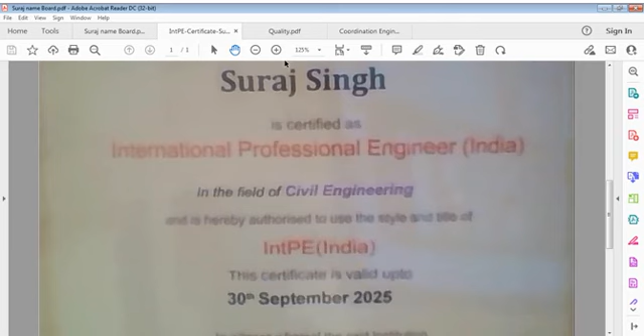This is my certificate of arbitration engineer, and this is International Professional Engineer certificate. This is Chartered Engineer certificate. This is quality file, and this is coordination file. I close Chartered Engineer certificate and I close arbitration engineer certificate. I'll open if it's required.

And now we go to the quality file. Quality, which is the essence of this talk. It's not new, it has been for long. For me, quality is life. You have life - if it is quality-less, you have no life, frankly speaking. People think money is life.

Some people think spiritualism is life. Some people think good living is life, or art of living is life. But nobody talks of requirement of quality, and that's unfortunate. People are not interested in quality of life. Quality of life means what we do, what is our contribution to make something good, and then better, and then best. Do we? My answer is no.

And particularly in our country, that is Bharat, India, we have to question ourselves for the quality issue and also for the coordination issue. Digital world has destroyed coordination. To be very frank, I can openly and with full confidence state quality cannot be achieved without application of required coordination, and coordination can be effected only if we know what information

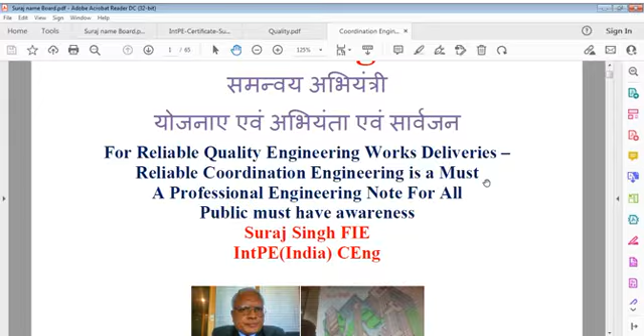We have to keep ourselves awakened, not sleeping, if we want to achieve something. In this regard, coordination is very important, and that is engineering coordination, for projects, for public, and we can say reliable quality engineering works deliveries is must. Same way, reliable coordination engineering is a must. Quality engineering is a must. Professional engineering, of course, constitutes both.

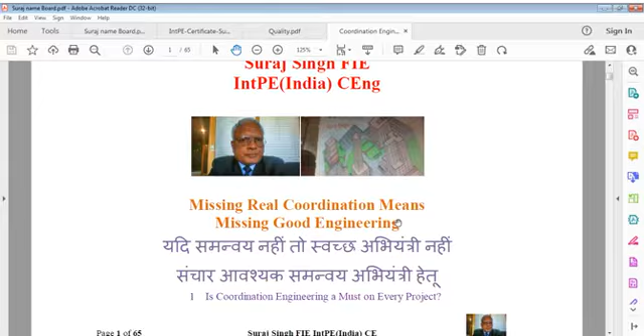And in addition to these subsidiaries, it requires primary materials, primary technology, and missing real coordination means missing good engineering. There are so many issues involved in this, and we have to be very serious about that.

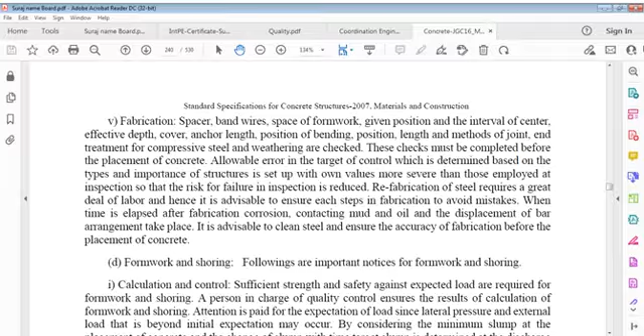Now I'm just moving on to file of concrete, because that is an important item, concrete, which we may say is our real requirement. We were yesterday somewhere, and it was mass concrete. I'll start from that, because mass concrete is a very important item, and its general is mass concrete. We did it yesterday, but because of disconnection of video, we could not continue it. So I'm just moving back to page 228 of mass concrete or massive block concrete.

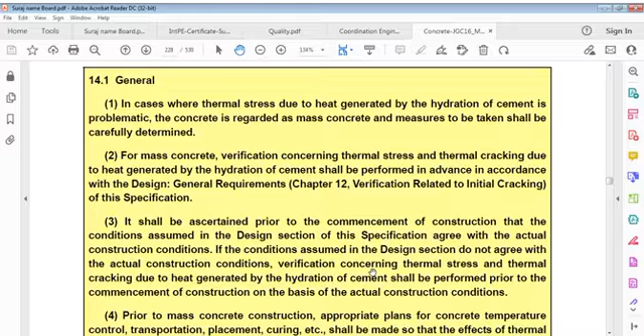In cases where thermal stress due to heat generated by hydration of cement is problematic, concrete is regarded as mass concrete, and measures to be taken shall be carefully determined. Mass concrete verification concerning thermal stress and thermal cracking due to heat generated by hydration of cement shall be performed in advance in accordance with design general requirements.

It shall be ascertained prior to commencement of construction that conditions assumed in design section of this specification agree with actual construction conditions. If conditions assumed in design section do not agree with actual construction conditions, verification concerning thermal stress and thermal cracking due to heat generated by hydration of cement shall be performed prior to commencement of construction on basis of actual construction conditions.

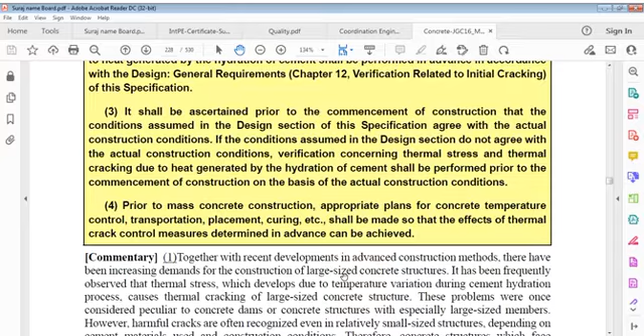I repeat, it shall be ascertained prior to commencement of construction that conditions assumed in design section of this specification agree with actual construction conditions. If conditions assumed in design section do not agree with actual construction conditions, verification concerning thermal stress and thermal cracking due to heat generated by hydration of cement should be performed prior to commencement of construction on basis of actual construction conditions.

Prior to mass concrete construction, appropriate plans for concrete temperature control, transportation control, placement control, curing control, etc. shall be made so that effects of thermal crack control measures determined in advance can be achieved. So these are many controls we should think of again and again: temperature control, that's very important when fresh concrete is delivered, and transportation from mixing plant to site and from site to actual location of concrete, which is done by either crane or by pumping.

And then when you received it on location, how to place it there, placing concrete on slabs or in columns or in beams or whatever else. And after doing finishing of that placement, after vibration, etc., curing, how to apply that - all these plans should be considered prior to doing mass concrete or massive block concrete. It's not easy. Every activity requires to be understood in this way, and this shall be made so that effects of thermal crack control measures determined in advance can be achieved, and that is the objective of mass concrete, because temperature difference, generation of temperature itself, thermal energy in case of mass concrete is quite huge, it's quite considerable.

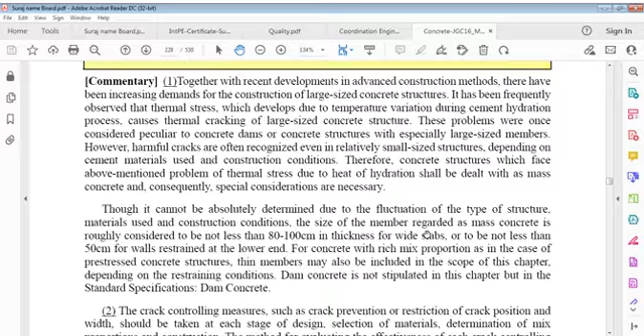Concrete structures which face the above mentioned problems of thermal stress due to heat of hydration shall be dealt with as mass concrete, and consequently special considerations are necessary. Though it cannot be absolutely determined due to fluctuation of type of structure.

Depending on materials used and construction conditions, size of member regarded as mass concrete is roughly considered to be not less than 80 to 100 centimeters, or 1 meter - you may say 800 to 1000 mm size. Generally it is 80 centimeters or 800 mm which we take in practical life. I have seen many projects about that, and a size of 80 centimeters or 800 mm is considered a thick member.

Ought to be not less than, for walls it is 500 mm. If a wall is 500 mm or more thick, it's considered a thick member or massive block. And if it is restrained at the lower end, for concrete with a rich mixed proportion, as in case of prestressed

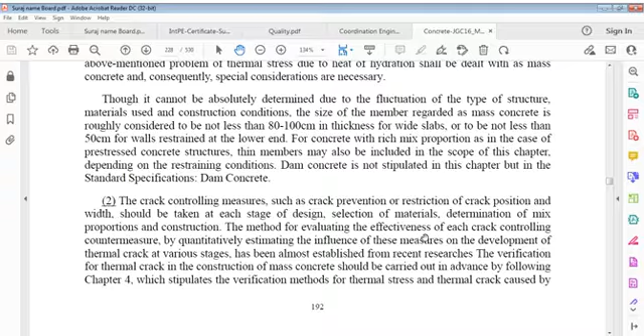Prestressed concrete structures, thin members may also be included in the scope of this chapter if it is prestressed concrete, depending on restraining conditions. Dam concrete is not stipulated in this chapter but in the standard specification for dam concrete.

Crack controlling measures such as crack prevention, or restriction of crack position and width, should be considered at each stage: design, selection of materials, determination of mix proportions and construction. Selection of materials - what materials we have to select, aggregate, etc. Determination of mix proportions, that is by trial mix, and its construction.

Method for evaluating effectiveness of each crack controlling countermeasure by quantitatively estimating the influence of these measures on development of thermal crack at various stages has been almost established from recent researches. Verification for thermal crack in construction of mass concrete should be carried out in advance by the following.

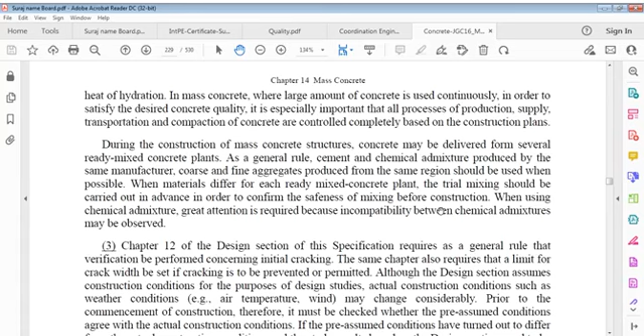Block concrete, where a large amount of concrete is placed continuously in order to satisfy desired concrete quality - it is especially important that all processes of production, supply, transportation and compaction of concrete are controlled completely based on construction plans. So we have again to go back to the process of production, supply, transportation and compaction of concrete, which all require complete professional controls.

That's why I always stress on method statements, construction procedures, which are very significant before doing whatever job we do. And if we don't do that, this means we do it in a blind world.

During construction of mass concrete structures, concrete may be delivered from several ready-mix concrete plants. As a general rule, cement and chemical admixture produced by the same manufacturer, and coarse and fine aggregates produced from the same region, should be used when possible.

When materials differ for each ready-mix concrete plant, trial mix should be considered. It should be carried out in advance in order to confirm safety, or you can say without impact, before construction. When using chemical admixture, great attention is required because incompatibility between chemical admixtures may be observed.

As a general rule, verification should be performed concerning initial cracking. The same chapter also requires that a limit for crack width be set, if cracking is to be prevented or permitted.

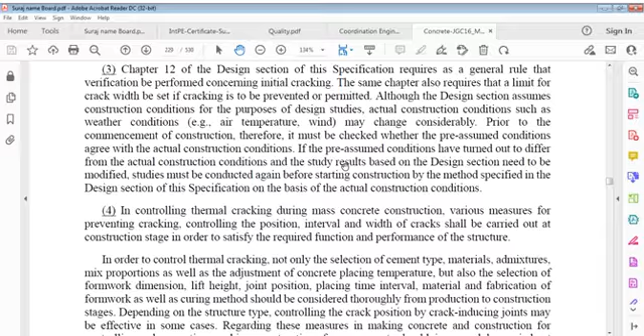Although the design section assumes construction conditions for purposes of design studies, actual construction conditions such as weather conditions, air temperature, wind speed may change considerably prior to commencement of construction. It must be checked whether or not presumed conditions agree with actual construction conditions.

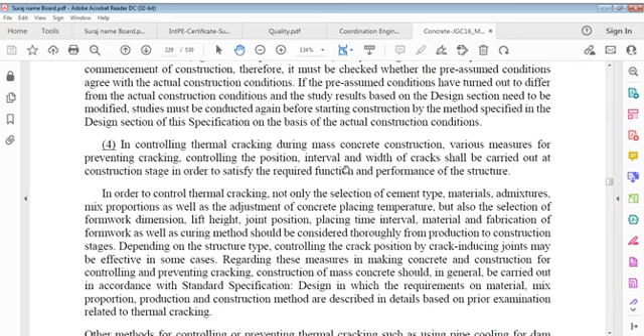If pre-assumed conditions have turned out to differ from actual construction conditions, and study results based on the design section require modification, studies must be conducted again before starting construction by the method specified in the design section.

In controlling thermal cracking during massive block concrete pouring construction, various measures for preventing cracking and controlling position, interval and width of cracks should be carried out at the construction stage in order to satisfy required function and performance of the structure.

In order to control thermal cracking, not only selection of cement type, materials, admixtures and mix proportions, as well as adjustment of concrete placing temperature, but also selection of formwork dimension, lift height, joint position, placing time, interval, material and fabrication of formwork, as well as curing method, should be considered thoroughly from production to construction stages.

In order to control thermal cracking, what do we have to do? Not only selection of cement type, materials, admixtures, mix proportions, and adjustment of concrete placing temperature, but also selection of formwork dimensions, height of concrete lift, location of construction joints, placing time interval, material and fabrication of formwork, as well as curing method. Consideration must be given thoroughly from production to construction stages.

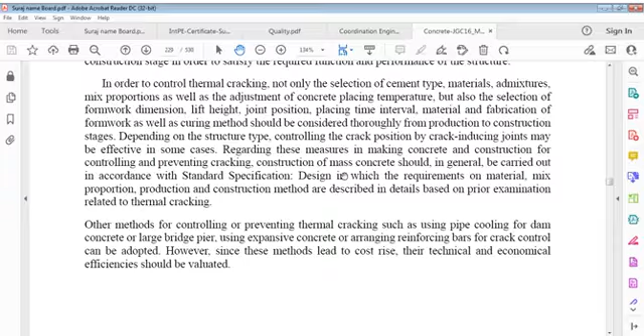Regarding these measures in making concrete and construction for controlling and preventing cracking, construction of mass concrete should in general be carried out in accordance with standard specification. Designs in which requirements on material, mix proportion, production and construction methods are described in detail are based on prior examination related to thermal cracking.

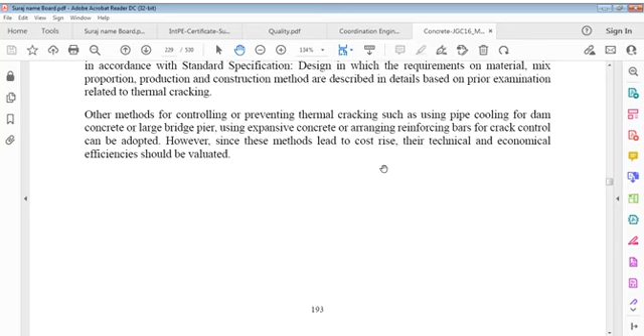Other methods of controlling or preventing thermal cracking, such as using pipe cooling for dam concrete or large bridge piers, using expansive concrete, or arranging reinforcing bars for crack control, can be adopted. However,

what about materials? Cement and admixtures used in mass block concrete should be those specified in design, and if other cement or admixtures are to be used, verification concerning thermal stress and thermal cracking due to heat generated by hydration of cement shall be performed.

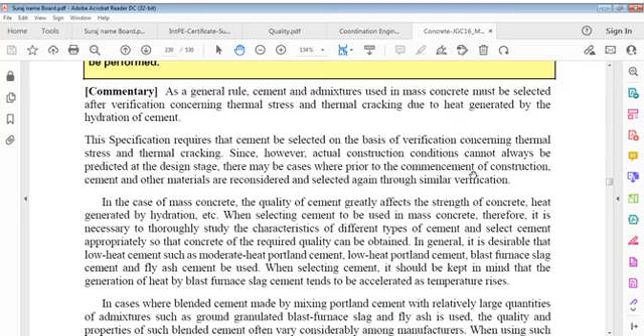Cement and admixtures used in mass concrete must be selected after verification concerning thermal stress and thermal cracking due to heat generated by hydration of cement. Specification requires the cement be selected on the basis of verification concerning thermal stress and thermal cracking.

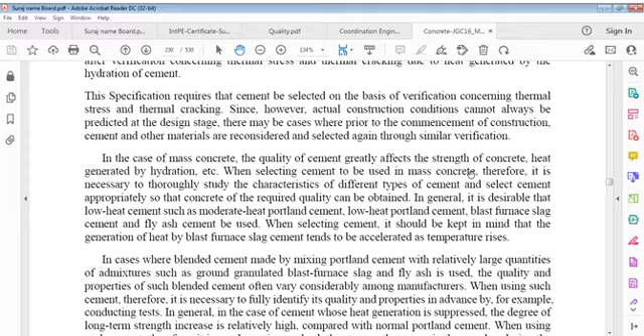Since, however, actual construction conditions can't always be predicted at the design stage, there could be cases where prior to commencement of construction, cement and other materials are reconsidered and selected again through similar verification.

In case of mass concrete, quality of cement greatly affects strength of concrete and heat generated by hydration when selecting cement to be used in mass concrete. Therefore, it is necessary to thoroughly study characteristics of different types of cement and select cement appropriately so that concrete of required quality can be obtained.

In general, it is desirable that low heat cement such as moderate heat Portland cement, low heat Portland cement, blast furnace slag cement, and fly ash cement be used. When selecting cement, it should be kept in mind that generation of heat by blast furnace slag cement tends to be accelerated as temperature rises.

In cases where blended cement made by mixing Portland cement with relatively large quantities of admixtures such as ground granulated blast furnace slag and fly ash is used, quality and properties of such blended cement often vary considerably among manufacturers. When using such cement, therefore, it is necessary to fully identify its quality and properties in advance by, for example, conducting tests. In general, in case of cement whose heat generation is suppressed,

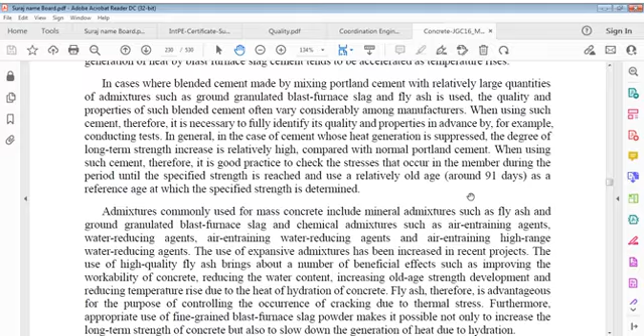degree of long-term strength increase is relatively high compared with normal Portland cement. When using such cement, therefore, it's good practice to check stresses that occur in the member during the period until specified strength is reached, and use a relatively old age around 91 days as a reference age at which specified strength is determined.

Admixtures commonly used for mass concrete include mineral ones such as fly ash, GGBS (ground granulated blast furnace slag), and chemical admixtures such as air entraining agents, water reducing agents, air entraining water reducing agents, and air entraining high range water reducing agents. Use of expansive admixtures has increased in recent projects.

Use of high quality fly ash brings about a number of beneficial effects such as improving workability of concrete, reducing water content, increasing old age strength development, and reducing temperature rise due to heat of hydration of concrete. Fly ash therefore is advantageous for the purpose of controlling occurrence of cracking due to thermal stress.

Furthermore, appropriate use of fine grained blast furnace slag powder makes it possible not only to increase long term strength of concrete but also to slow down generation of heat due to hydration.

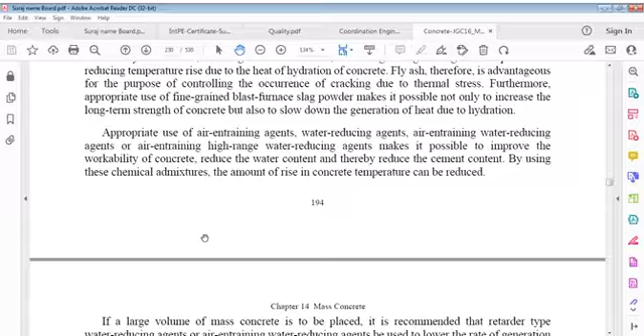Appropriate use of air entraining agents, water reducing agents, air entraining water reducing agents, or air entraining high range water reducing agents makes it possible to improve workability of concrete, reduce water content, and thereby reduce cement content. By using these chemical admixtures, the amount of rise in concrete temperature can be reduced.

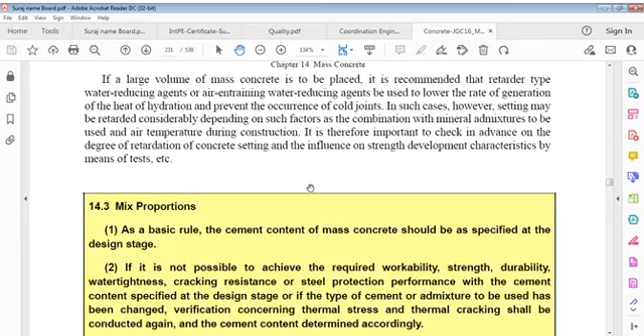If a large volume of mass concrete is to be placed, the recommendation is that retarder type water reducing agents or air entraining water reducing agents be used to lower the rate of generation of heat of hydration and prevent occurrence of cold joints. In such cases, however, setting may be retarded considerably depending on factors such as combination with mineral admixtures used and air temperature during construction. It is therefore important to check in advance the degree of retardation of concrete setting and influence on strength development characteristics by means of tests.

Mix proportions. As a basic rule: cement content of mass concrete should be as specified at the design stage. If it's not possible to achieve required workability, strength, durability, water tightness, cracking resistance, or steel protection performance with the cement content specified at design stage, or if the type of cement or admixture used has been changed, verification concerning thermal stress and thermal cracking shall be conducted again and cement content determined accordingly.

Rate of heat generation of concrete is roughly proportional to cement content, and in general concrete temperature increases or decreases by about 1 degree Celsius for every 10 kg per meter cube of increase in cement quantity.

A substantial increase in cement content determined as a result of verification concerning thermal stress and thermal cracking must be avoided. If however it is difficult to achieve required workability, strength, durability, water tightness, cracking resistance, or steel protection performance with the cement content specified at design stage, it may be necessary to reconsider cement content if the type of cement or admixture used is changed. It is necessary to perform verification concerning thermal stress and thermal cracking again, and determine a cement content, or binder content if non-cement binder is used or included, that doesn't cause any problem associated with thermal cracking.

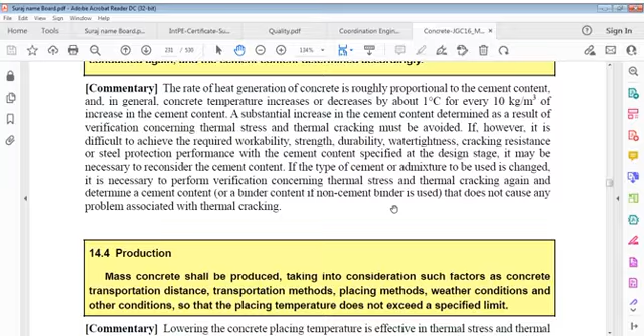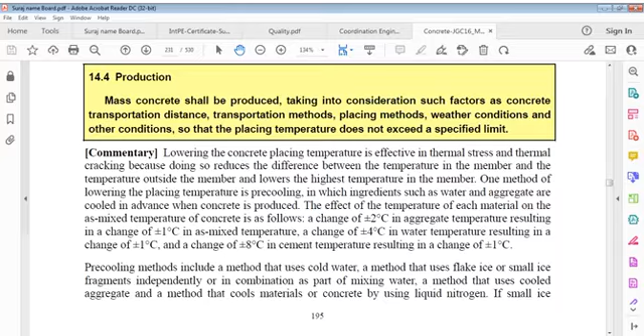So here the point is: 1 degree Celsius means if you use 10 kilogram per meter cube more cement, 1 degree Celsius is increased, and we generally take 32 or 35 degrees. This means 300 kilogram cement can give you about this 32.

Mass concrete shall be produced taking into consideration such factors as transportation distance, transportation methods, placing methods, weather conditions, and other conditions, so that placing temperature does not exceed the specified limit.

Lowering concrete placing temperature is effective in reducing thermal stress and thermal cracking, because doing so reduces the difference between temperature in the member and temperature outside the member, and lowers the highest temperature in the member. One method of lowering placing temperature is pre-cooling, in which ingredients such as water and aggregate are cooled in advance when concrete is produced.

Effect of temperature of each material on the as-mixed temperature of concrete is as follows: a change of plus minus 2 degrees Celsius in aggregate temperature results in a change of plus minus 1 degree Celsius in mixed temperature. A change of plus minus 4 degrees Celsius in water temperature results in a change of plus minus 1 degree Celsius, and a change of plus minus 8 degrees Celsius in cement temperature results in a change of plus minus 1 degree Celsius.

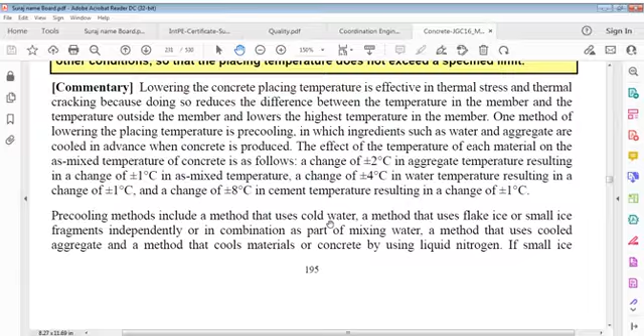So aggregate changes 2 degrees Celsius for 1 degree Celsius change in mixed temperature. Similarly, plus minus 4 degrees Celsius in water temperature results in plus minus 1 degree Celsius, and 8 degrees Celsius in cement temperature again results in plus minus 1 degree. So we can say: temperature of aggregate changes by 2 degrees, water by 4 degrees, and cement by 8 degrees. We have to keep this point in mind. This means if there is a change of plus minus 2 degrees in aggregate, or plus minus 4 degrees in water, or plus minus 8 degrees in cement temperature, then this results in plus minus 1 degree change in concrete temperature.

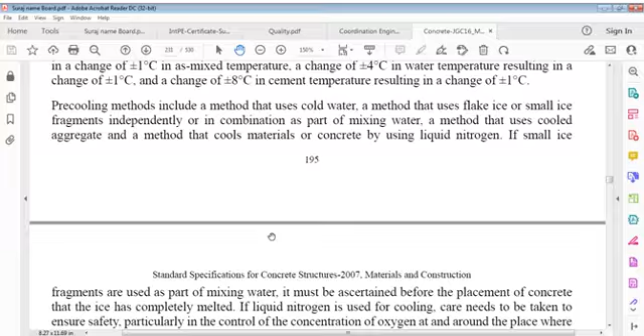Pre-cooling methods include a method that uses cold water, a method that uses flake ice or small ice fragments independently or in combination as part of mixing water, a method that uses cooled aggregate, and a method that cools materials or concrete by using liquid nitrogen. If small ice fragments are used as part of mixing water, it must be ascertained before placement of concrete that the ice has completely melted. If liquid nitrogen is used for cooling, care needs to be taken to ensure safety, particularly in control of concentration of oxygen, in the place where liquid nitrogen is used.

If liquid nitrogen is used for cooling, care must be taken to ensure safety, particularly in control of concentration of oxygen at and around the place where liquid nitrogen is used.

Even if temperature of concrete at time of production is lowered, concrete temperature may rise during transportation, so that placing temperature becomes higher than expected at the planning stage. It is important, therefore, to determine temperature of concrete at time of production, taking into account the likely rise in concrete temperature due to factors such as transportation distance, transportation methods, and weather conditions.

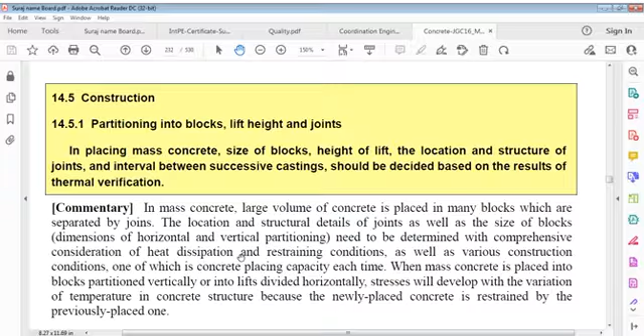Partitioning into blocks, lift height, and joints. In placing mass concrete, size of blocks, height of lift, location and structure of joints, and interval between successive castings should be decided based on results of thermal verification. Size of blocks means area; height of lift means to what height we have to cast concrete.

In mass concrete, large volume of concrete is placed in many blocks which are separated by joints. Location and structural details of joints as well as size of blocks...

Dimension of horizontal and vertical partitioning needs to be determined with comprehensive consideration of heat dissipation and restraining conditions, as well as various construction conditions, one of which is concrete placing capacity each time.

When mass concrete is placed into blocks partitioned vertically or into lifts divided horizontally, stresses will develop with variation of temperature. In concrete structure, because newly placed concrete is restrained by previously placed concrete, these stresses grow larger when differences in effective Young's modulus as well as temperature between new and old concrete increase.

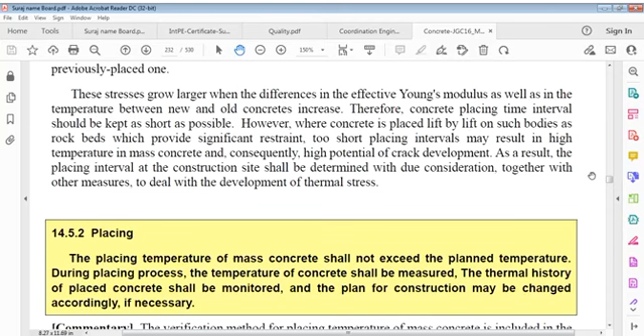Therefore, concrete placing time interval should be kept as short as possible. However, where concrete is placed lift by lift on bodies such as rock beds, which provide significant restraint, too short a placing interval may result in high temperature in mass concrete and consequently high potential of crack development. Placing interval at the construction site shall be determined in due consideration, together with other measures to deal with development of thermal stress.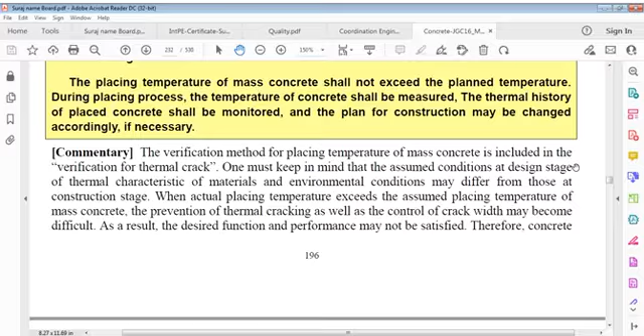Placing temperature of mass concrete shall not exceed planned temperature. During the placing process, temperature of concrete shall be measured. Thermal history of placed concrete shall be monitored, and the plan for construction may be changed accordingly if necessary. Verification method for placing temperature of mass concrete is included in verification of thermal crack.

One must keep in mind that assumed conditions at the design stage of thermal characteristics of material and environmental conditions may differ from those at the construction stage.

When actual placing temperature exceeds assumed placing temperature of mass concrete, prevention of thermal cracking as well as control of crack width may become difficult. As a result, desired function and performance may not be satisfied.

Concrete temperature and temperature rise of placed concrete should be confirmed at time of construction. Construction plan should be modified if actual construction conditions are too different from assumed ones, especially when placing concrete under scorching sun.

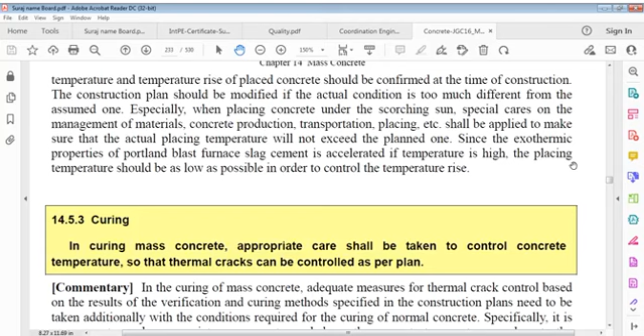Since exothermic properties of Portland blast furnace slag cement are accelerated if temperature is high, placing temperature should be as low as possible in order to control temperature rise.

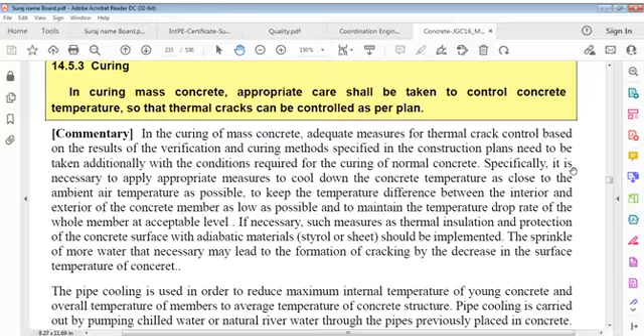Curing. In curing mass concrete, appropriate care should be taken to control concrete temperature so that thermal cracks can be controlled per plan.

In curing of mass concrete, adequate measures for thermal crack control based on results of verification and curing methods specified in construction plans are required to be taken additionally, along with conditions required for curing of normal concrete.

Especially, it is necessary to apply appropriate measures to cool down concrete temperature as close to ambient air temperature as possible, to keep the temperature difference between the interior and exterior of the concrete member minimal.

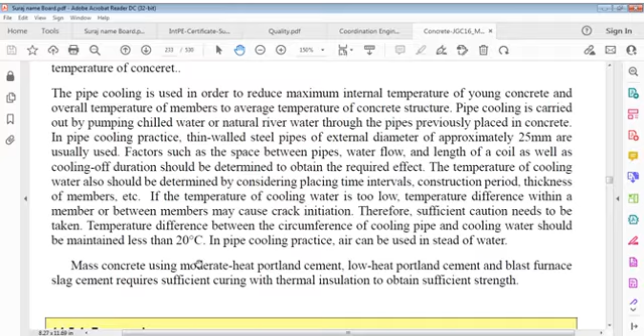Factors such as space between pipes, water flow, and length of coil as well as cooling duration should be determined to obtain required effect. Temperature of cooling water should also be determined by considering placing time intervals, construction period, thickness of members, etc. If temperature of cooling water is too low, temperature difference within member or between members may cause crack initiation. Therefore, sufficient caution is required.

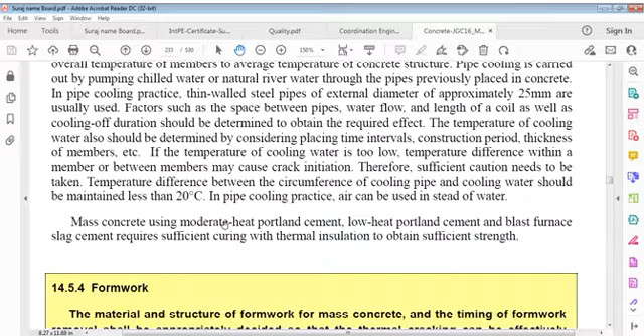Temperature difference between circumference of cooling pipes and cooling water should be maintained less than 20 degrees Celsius. In pipe cooling practice, air can also be used instead of water.

Mass concrete using moderate heat Portland cement, low heat Portland cement, and blast furnace slag cement requires sufficient curing with thermal insulation to obtain sufficient strength.

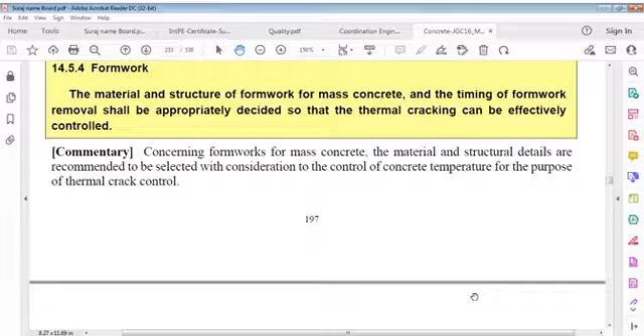Concerning formworks for mass concrete, material and structural details are recommended to be selected with consideration of control of concrete temperature for purpose of thermal crack control.

To minimize temperature rise, formworks which have high heat dissipation may be used. However, in case of mass concrete, control range of temperature rise is restricted and ambient temperature may drop drastically after placing. Use of exoteric metal formwork may cause large temperature difference between internal part of concrete and its surface.

Sometimes use of insulated formwork is effective. When insulated formworks are used, retaining duration is prolonged in principle compared with conventional formworks, and thermal insulation of concrete surface is recommended to be continued after formwork removal by such measures as covering concrete with plastic sheets so as to protect concrete surface from rapid cooling.

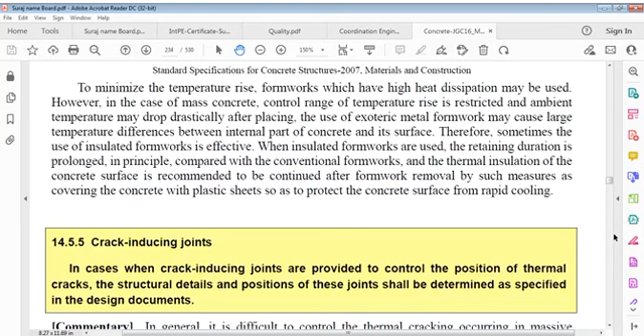It's important that when insulated formworks are used, retaining duration is prolonged in principle compared with conventional formwork, and thermal insulation of concrete surface is recommended to be continued after formwork removal by such measures as covering concrete with plastic sheets so as to protect concrete surface from rapid cooling.

Crack inducing joints. In cases when crack inducing joints are provided to control position of thermal crack, structural details and positions of these joints shall be determined as specified in design documents.

Crack inducing joints. It's difficult to control thermal cracking occurring in massive wall type structures by taking measures from material or mix design aspect. In such cases, there is a method in which reduced sections are provided at certain spacing intervals along the longitudinal direction of the structure to induce cracking at these sections, to prevent cracking at other portions, and to easily take care of the cracked section.

Now, certain crack inducing joints we have to think of. Quality control - we'll see that crack inducing joints are discussed in chapter design section 14.8. Look into that one. Now it is quality control.

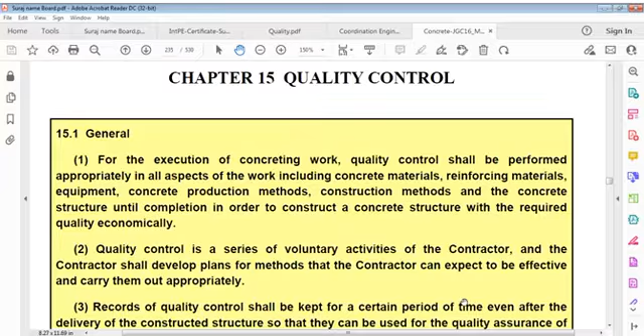Quality control, which is very significant for execution of concrete work. For execution of concrete work, quality control shall be performed appropriately in all aspects of work, including concrete materials, reinforcing materials, equipment, concrete production methods, construction methods, and concrete structure until completion, in order to construct a concrete structure with required quality economically.

For execution of concrete work, quality control shall be performed appropriately in all aspects of work, including concrete materials, reinforcing materials, equipment, concrete production methods, construction methods, and concrete structure until completion, in order to construct a concrete structure with required quality economically.

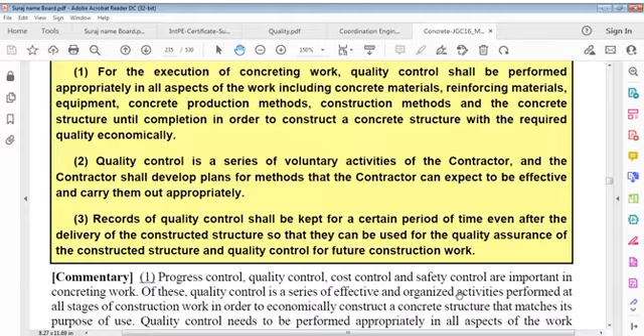Quality control is a series of voluntary activities of the contractor, and contractors shall develop plans of methods that the contractor can expect to be effective and carry them out appropriately. Records of quality control shall be kept for a certain period of time even after delivery of the constructed structure so that they can be used for quality assurance of the constructed structure and quality control of future construction work.

Progress control. Progress control, quality control, cost control, and safety control are important in concrete work.

Of these, quality control is a series of effective and organized activities performed at all stages of construction work in order to economically construct a concrete structure that matches its purpose of use.

Of these, quality control is a series of effective and organized activities performed at all stages of construction work in order to economically construct a concrete structure that matches its purpose of use. Quality control requires to be performed appropriately in all aspects of work, including concrete materials, reinforcing materials, equipment, concrete production methods, construction methods, and concrete structure until completion.

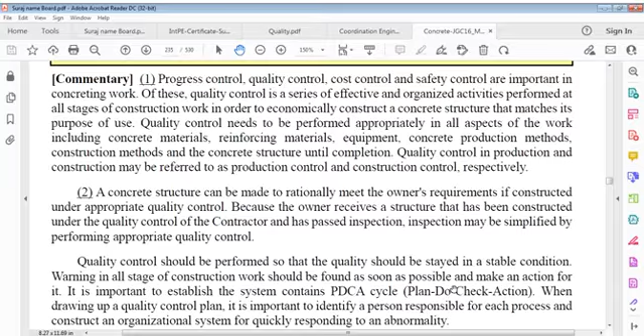Quality control in production and construction may be referred to as production control and construction control respectively. A concrete structure can be made to rationally meet owners' requirements if constructed under appropriate quality control, because the owner receives a structure that has been constructed under quality control of the contractor and has passed inspection.

Inspection may be simplified by performing appropriate quality control. Quality control should be performed so that quality stays in a stable condition. Warnings at all stages of construction work should be found as soon as possible and action taken for them.

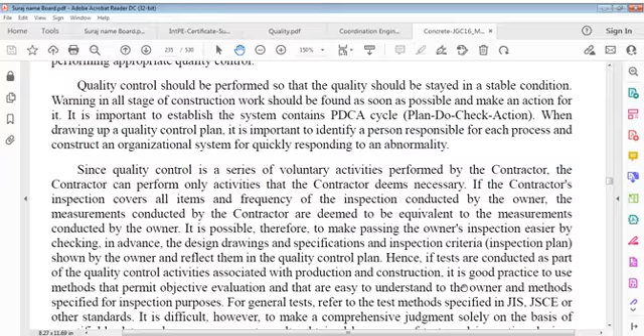It's important to establish a system containing the PDCA cycle: plan, do, check, and act. When drawing up a quality control plan, it's important to identify a person responsible for each process and construct an organizational system for quickly responding to an abnormality.

Since quality control is a series of voluntary activities performed by the contractor, the contractor can perform only activities that the contractor deems necessary. If contractor inspection covers all items and the frequency of inspection conducted by the owner, measurements conducted by contractors are deemed to be equivalent to measurements conducted by the owner.

It is possible, therefore, to make passing the owner's inspection easier by checking in advance the design drawings and specifications, and inspection criteria and inspection plan shown by the owner, and reflect them in the quality control plan.

If tests are conducted as part of quality control activities associated with production and construction, it's good practice to use methods that permit objective evaluation and that are easy to understand, and methods specified for inspection purposes. For general tests, refer to test methods or other standards. It's difficult, however, to make a comprehensive judgment.

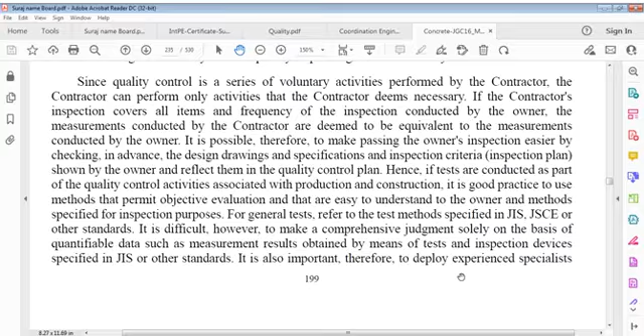If tests are conducted as part of quality control activities associated with production and construction, it's good practice to use methods that permit objective evaluation and that are easy to understand, and methods specified for inspection purposes. For general tests, refer to specifications or other standards. It's difficult, however, to make a comprehensive judgment solely on the basis of quantifiable data, such as measurement results obtained by means of tests and inspection devices. It is also important, therefore, to deploy experienced specialists and make judgments based on visual inspections.

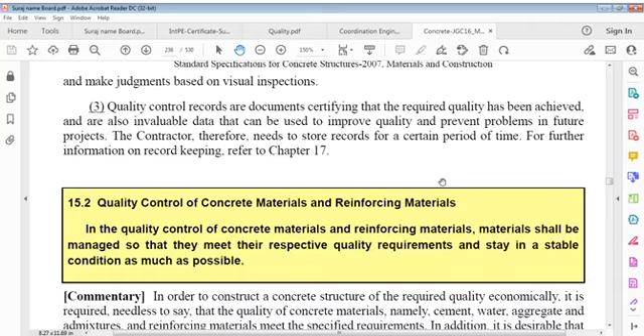Quality control records are documents certifying that the required quality has been achieved and are also invaluable data that can be used to improve quality and prevent problems in future projects. The contractor, therefore, needs to store records for a certain period of time, and that's important.

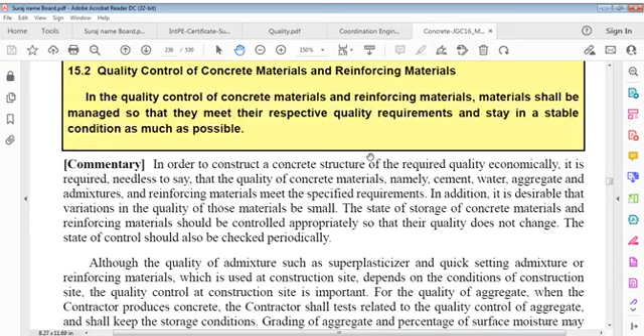Quality control of concrete materials and reinforcing materials: materials shall be managed so that they meet their respective quality requirements and stay in stable condition as much as possible. In order to construct a concrete structure of required quality economically, it is necessary that the quality of concrete materials, namely cement, water, aggregate and admixtures, and reinforcing materials meet specified requirements.

In addition, it is desirable that variations in quality of those materials be small. The state of storage of concrete material and reinforcing material should be controlled appropriately so that their quality does not change. The state of control should also be checked periodically, although the quality of mixed admixtures such as superplasticizer and quick setting admixture also affects quality control.

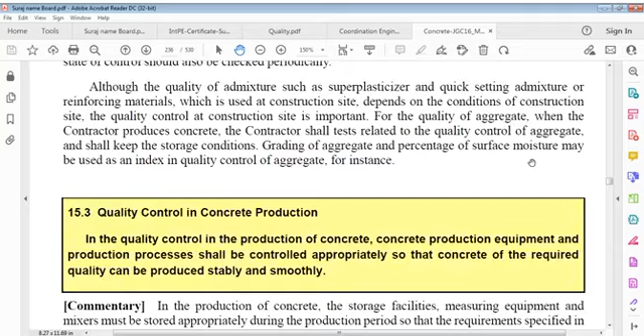Quality control at construction site is important for quality of aggregate when contractor produces concrete. Contractor shall test related to quality control of aggregate and shall keep storage conditions, grading of aggregate and percentage of surface moisture, which may be used as an index in quality control of aggregate.

For instance, quality control in concrete production: production equipment and production processes must be controlled appropriately so that concrete of required quality can be produced stably and smoothly. In production of concrete, storage facilities, measuring equipment and mixers must be stored appropriately during the production period so that requirements specified in section 5.2 are met.

In order to continue to produce concrete of stable quality, it's good practice to measure surface moisture content of aggregate with moisture meters on a continuous basis, and if a considerable change or abnormality in property of concrete has been observed, take aggregate samples and compare surface moisture contents, because it is necessary to ascertain that measurement errors are small enough to stay within an allowable range.

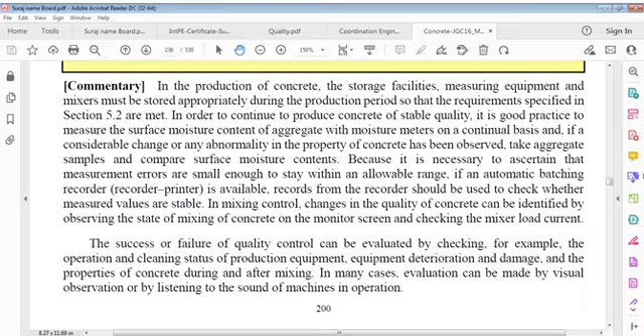Success or failure of quality control can be evaluated by checking, for example, operation and cleaning status of production equipment, deterioration and damage, and by observation or listening to sound of machines in operation.

Test results such as compressive strength, slump and air content of concrete can be recognized by quality charts. Obtained data is plotted in a chart with mean value, upper and lower control lines. For quality control, the range of control lines should be defined appropriately. When a result out of range is observed, it should be investigated whether the reason for change causes a permanent change of quality, and a provision for it should be conducted. The control limit line should be changed based on quality control data.

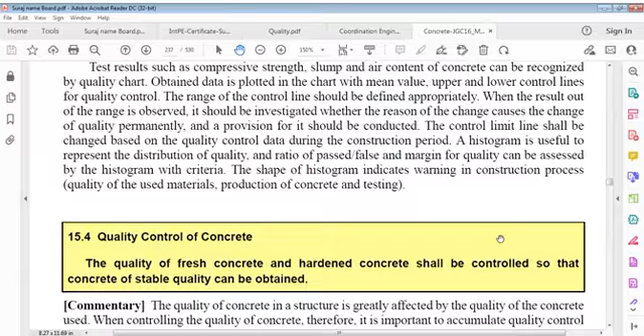During the construction period, a histogram is useful to represent the distribution of quality, and the ratio of pass or fail and margin for quality can be assessed by histograms with criteria. The shape of the histogram indicates warning signs in the construction process, quality of materials used, production of concrete, and testing.

Quality control of concrete: quality of fresh concrete and hardened concrete must be controlled so that concrete of stable quality can be obtained. Quality of concrete in a structure is greatly affected by the quality of concrete used. When controlling quality of concrete, therefore, it's important to accumulate quality control data and analyze it on a daily basis, so that the relationship of quality of concrete with production of concrete materials and concrete can be quantified.

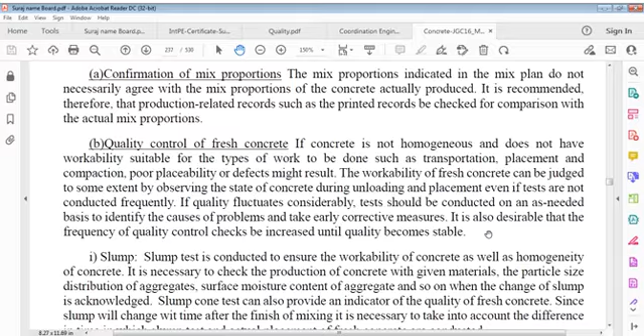Quality control should be conducted at appropriate periods and frequency, referring to the inspection standard chapter. Confirmation of mix proportion: mix proportions indicated in the mix plan do not necessarily agree with mix proportions of concrete actually produced. It is therefore recommended that production-related records, such as printed records, be checked for comparison with actual mix proportions. Quality control of fresh concrete.

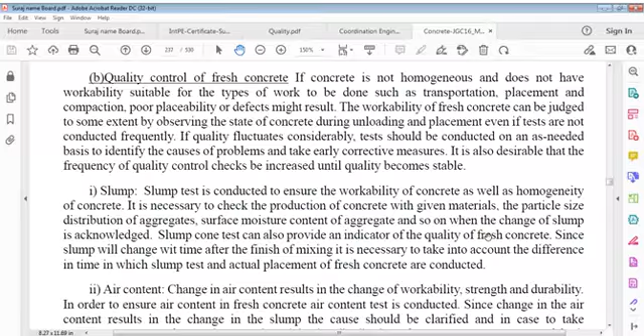If concrete is not homogeneous and does not have workability suitable for the type of work to be done, such as transportation, placement and compaction, poor placeability or defects might result. Workability of fresh concrete can be judged to some extent by observing the state of concrete during unloading and placement. Even if tests are not conducted frequently, if quality fluctuates considerably, tests should be conducted on an as-required basis to identify the cause of problems and resort to early corrective measures. It's also desirable that the frequency of quality control checks be increased until quality becomes stable.

Slump, air content, and temperature of concrete. Slump test is conducted to ensure workability of concrete as well as homogeneity of concrete.

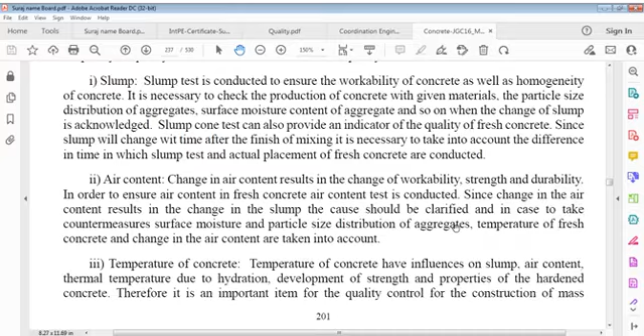It is necessary to check production of concrete with given material, particle size distribution of aggregate, surface moisture content of aggregate, and so on, with change when a change of slump is acknowledged. Slump cone test can also provide an indicator of the quality of fresh concrete. Since slump changes with time after finish of mixing, it is necessary to take into account the difference in time between when the slump test and actual placement of fresh concrete are conducted.

Air content: change in air content results in change of workability, strength and durability. In order to ensure air content in fresh concrete, an air content test is conducted. Since change in air content results in change in slump, the cause should be clarified, taking into account the concrete and changes in air content.

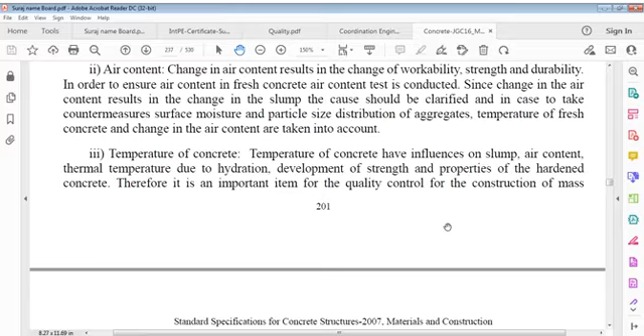Temperature of concrete has influences on slump, air content, thermal temperature due to hydration, development of strength, and properties of hardened concrete. It's an important item for quality control in construction of mass concrete, cold weather concrete and hot weather concrete. Besides, it's necessary to check temperature of concrete during curing.

Quality control of hardened concrete.

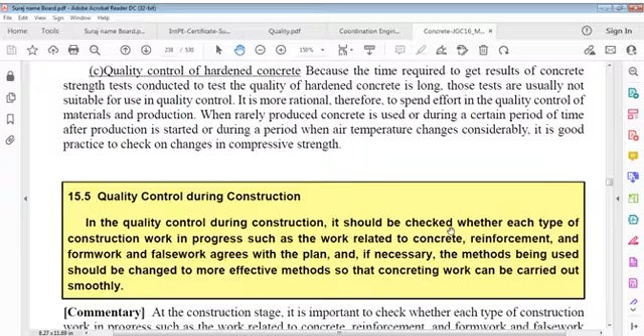Because the time required to get results of concrete strength tests conducted to check the quality of hardened concrete is too long, those tests are usually not suitable for use in quality control. It's more rational, therefore, to spend effort on quality control of material and production. When rarely produced concrete is used during a certain period after production starts, or during a period when air temperature changes considerably, it is good practice to check on changes in compressive strength.

Quality control during construction. In quality control during construction, it should be checked, whether each type of construction work in progress, such as work related to concrete, reinforcement, and formwork and falsework, agrees with plan.

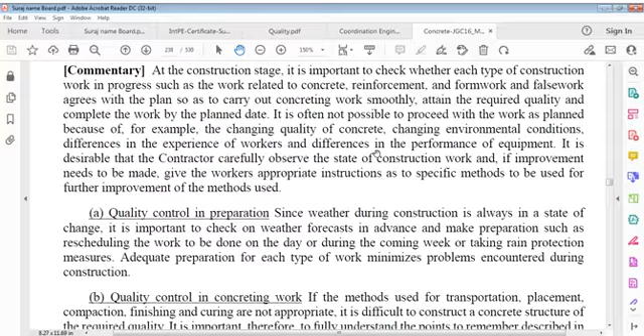It's often not possible to proceed with work as planned because of, for example, changing quality of concrete, changing environmental conditions, differences in experience of workers, and differences in performance of equipment. It's needed to give workers appropriate instructions as to specific methods to be used for further improvement of the method used.

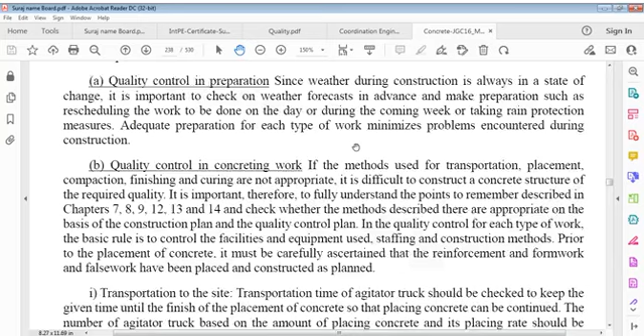Quality control in preparation. Since weather during construction is always in a state of change, it's important to check on weather forecasts in advance and make preparations, such as rescheduling work to be done on the day or during the coming week, or taking rain protection measures. Adequate preparation of each type of work minimizes problems encountered during construction.

Quality control in concreting work. If methods used for transportation, placement, compaction, finishing and curing are not appropriate, it's difficult to construct a concrete structure of required quality. It's important therefore to fully understand the points to remember described in...

It's difficult to construct a concrete structure of required quality. It's important therefore to fully understand the points to remember described in the chapters, and check whether the method described there is appropriate on the basis of the construction plan and quality control plan.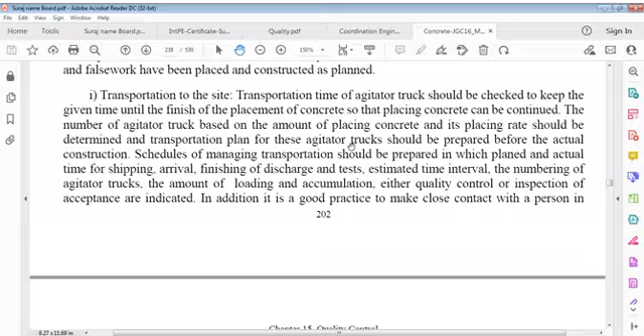A schedule for organizing transportation should be prepared, in which planned and actual times of shipping, arrival, finishing of discharge, and tests, estimated time of arrival and interval, number of agitator trucks, amount of loading, and accumulation, and either quality control or inspection of acceptance are indicated. In addition, it's good practice to make close contact with the person in charge of quality control at factories and at the placing site. These practices make it easier to place concrete continuously.

Transportation within site.

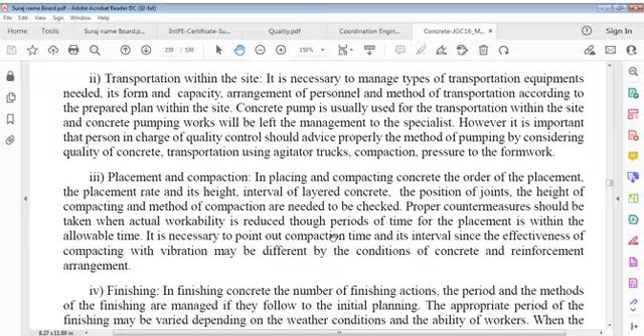Concrete pump is usually used for transportation within site, and concrete pumping works should be left to management of specialist. However, it is important that person in charge of quality control should advise properly on method of pumping by considering quality of concrete, transportation using agitator trucks, compaction and pressure to the formwork.

Placement and compaction in placing and compacting concrete. Order of placement, placement rate and its height, interval of layered concrete, position of joints, height of compaction, compacting and method of compaction are required to be checked. Proper countermeasures should be taken when actual workability is reduced.

Though period of time for placement is within allowable time. It is necessary to point out compaction time and its interval, since effectiveness of compacting with vibration may be different depending on conditions of concrete and reinforcement arrangements.

Finishing concrete. In finishing concrete, number of finishing actions, period and methods of finishing are managed if they follow initial planning. Appropriate period of finishing may be varied depending on weather conditions and ability of workers. When finishing time of placing concrete is delayed, finishing actions may be carried out...

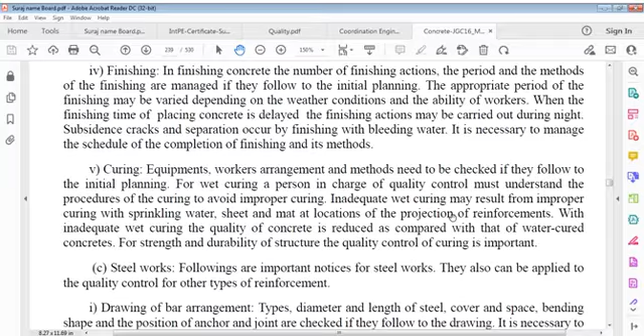Subsidence, cracks and separation occur by finishing with bleeding water. It is necessary to manage schedule of completion of finishing and its methods when finishing time of placing concrete is delayed.

Curing. Equipment, workers, arrangement, and methods required to be checked if they follow initial planning. For wet curing, a person in charge of quality control must understand procedures of curing to avoid improper curing. Inadequate wet curing may result from improper curing with sprinkling water, sheet and mat at locations of projection of reinforcement.

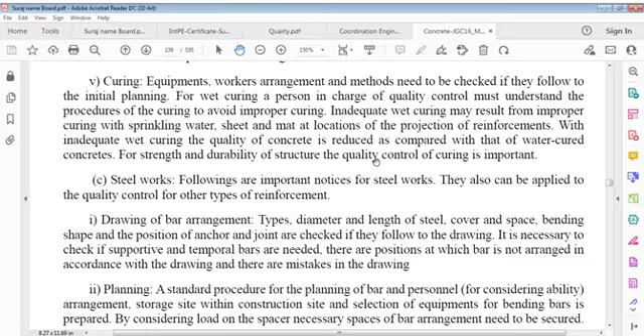With inadequate wet curing, quality of concrete is reduced as compared with that of water-cured concrete. For strength and durability of structure, quality control of curing is important.

I have to just read this for a couple of minutes, and I think we'll be back. Okay.

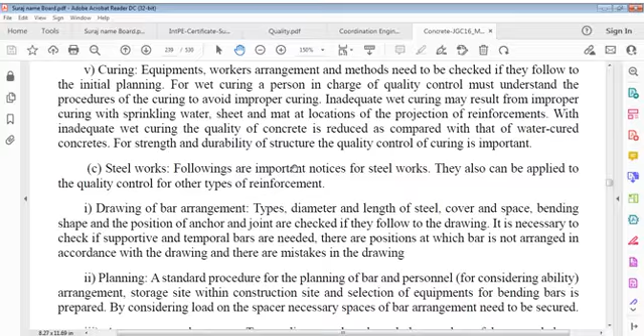It's a very important item, and we have to see curing equipment, workers' arrangement and methods, need be checked if they follow to initial planning. For wet curing, a person in charge of quality control must understand procedures of curing to avoid improper curing. Inadequate wet curing may result from improper curing with sprinkling water, sheet and mat at locations of projection of reinforcements. With inadequate wet curing, quality of concrete is reduced as compared to that of water-cured concrete. For strength and durability of structure, quality control of curing is important.

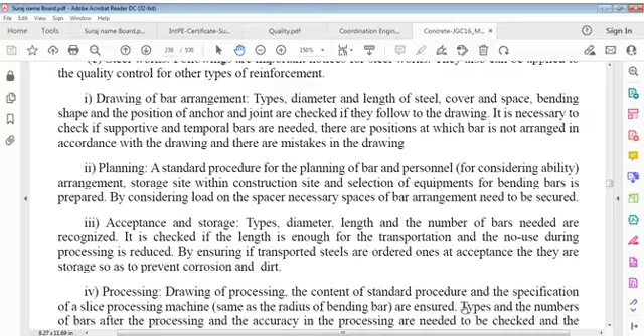Steelworks. Following are important notices for steelworks; they also can be applied to quality control for other types of reinforcement: drawing of bar arrangement, planning, acceptance and storage. Types, diameter and length of steel cover and spacing, bending shape and position of anchor and joints are checked if they follow drawings. It is necessary to check if supportive and temporal bars are required. There are positions at which bar is not arranged in accordance with drawing, and mistakes occur in drawings.

Planning: a standard procedure for planning of bar and personnel, considering ability, arrangement, storage site within construction site, and selection of equipment for bending bars is prepared. By considering load on spacer, necessary spaces of bar arrangement need be secured.

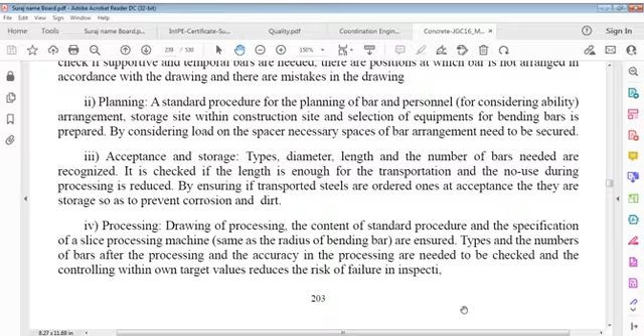Acceptance and storage: types, diameter, length and number of bars required are recognized. Checked if length is enough for transportation, and no-use during processing is reduced. By ensuring if transported steel are ordered ones at acceptance, and they are stored so as to prevent corrosion and dirt.

Drawing of processing: content of standard procedure and specification of a slice processing machine are ensured. Types and numbers of bars after processing and accuracy of processing are needed to be checked, and controlling within own target values reduces risk of failure in inspection. Fabrication.

Spacer, band wires, space of formwork, given position and interval of center, effective depth, cover, anchor length, position of bending, position length and method of joint, and treatment for compressive steel and weathering are checked. Checks must be completed before placing concrete.

Allowable error in target of control, which is determined based on types and importance of structure, is set up with own values more severe than those employed at inspection, so that risk for failure in inspection is reduced.

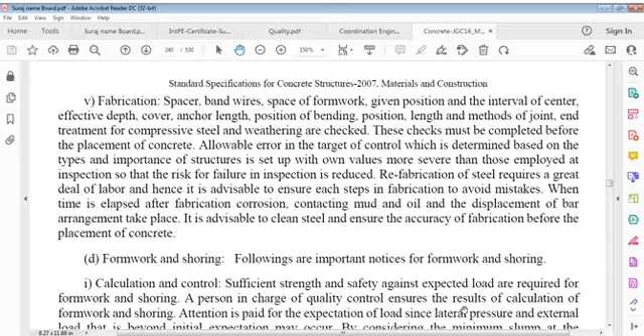When time has elapsed after fabrication, corrosion, contacting mud and oil, and displacement of bar arrangement affect the work, so it is advisable to clean steel and ensure accuracy of fabrication before placing concrete.

Formwork and shoring. Important notices for formwork and shoring: calculation and control.

Sufficient strength and safety against expected load are required for formwork and shoring. A person in charge of quality control ensures the results of calculation for formwork and shoring. Attention is paid to expectation of load, since lateral pressure and external load beyond initial expectation may occur.

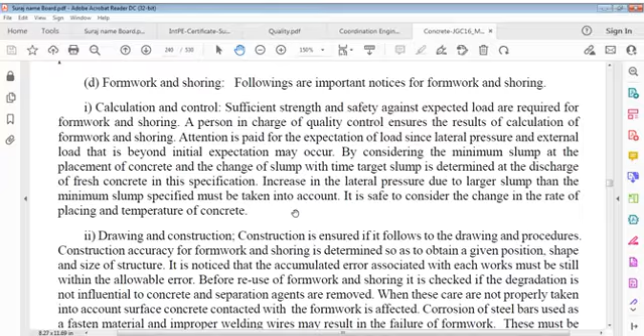By considering minimum slump at placement of concrete and change in slump with time, target slump is determined at discharge of fresh concrete in specification. Increase in lateral pressure due to larger slump means the minimum slump specified must be taken into account. It's safe to consider change in rate of placing and temperature of concrete.

Drawing and construction. Construction is ensured if it follows the proper procedure. Construction accuracy for formwork and shoring is determined so as to obtain a given position, shape and size of structure. It is noted that accumulated error associated with each work must still be within allowable errors.

Before reuse of formwork and shoring, it is checked if degradation is not influential to concrete, and separation agents are removed.

When these cares are not properly taken into account, surface concrete contacted with formwork is affected. Corrosion of steel bars used as fastening material and improper welding wires may result in failure of formwork. This must be paid attention to so it does not occur, and all this is called remaking of plates, remaking of formwork.

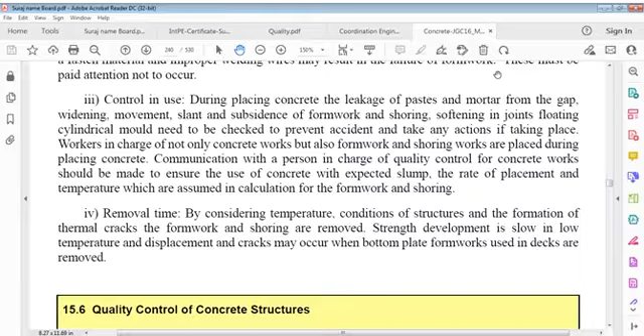Workers in charge of not only concrete works but also formwork and shoring works are placed during placing of concrete. As we have said, carpenters are required, steel fixers are required. Communication with a person in charge of quality control for concrete works should be made to ensure use of concrete with expected slump, rate of placement, and temperature, which are assumed in calculation for formwork and shoring.

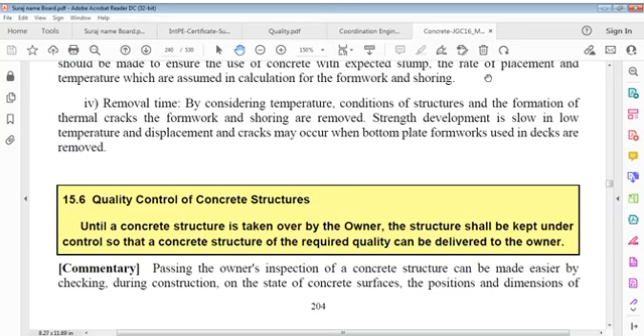Removal time is determined by considering temperature, conditions of structures, and formation of thermal cracks, and formwork and shoring are removed accordingly. Strength development is slow in low temperature and displacement. Cracks may occur when bottom plate formworks used in decks are removed.

Quality control of concrete structures. Until a concrete structure is taken over by the owner, the structure shall be kept under control so that a concrete structure of required quality can be delivered to the owner.

Passing the owner's inspection of concrete structure can be made easier by checking during construction the state of concrete surfaces, positions and dimensions of concrete members, quality of concrete in structure, and concrete cover.

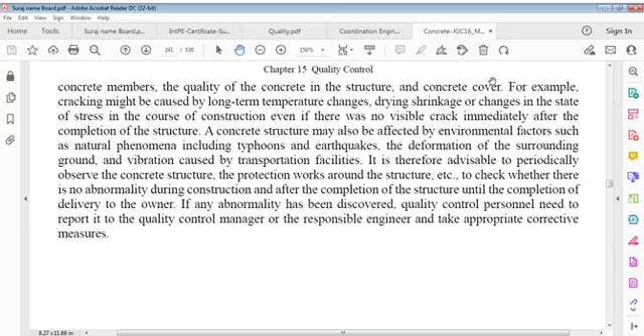For example, cracking might be caused by long-term temperature changes, drying shrinkage, or changes in state of stress in the course of construction, even if there was no single visible crack immediately after completion of the structure.

A concrete structure may also be affected by environmental factors such as natural phenomena including typhoons and earthquakes, and deformation of surrounding ground.